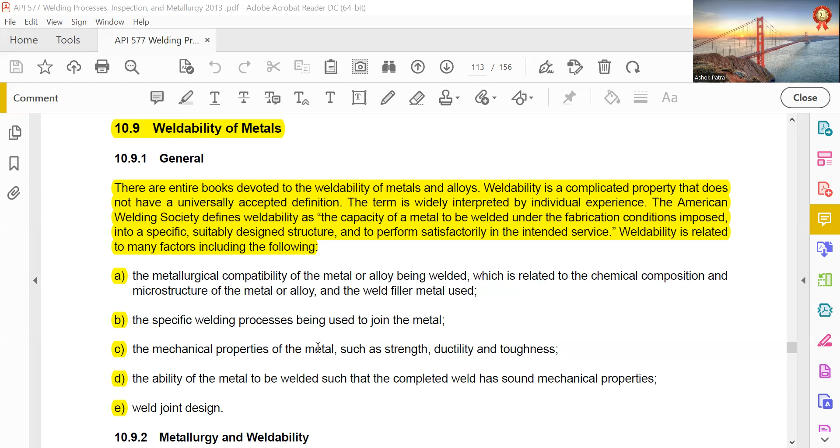Metallurgy and weldability: the primary factor affecting the weldability of metals and alloys is their chemical composition. Chemical composition controls the range of mechanical properties in carbon alloy steels. It has the most influence on the effects of welding on the material. The metal is said to have good weldability if the limits are wide; if not, the metal is considered to have poor weldability.

The heat cycle from welding produces a heat treatment of the metal that can have a substantial effect on mechanical properties depending on the chemical composition of the metal being welded. As noted earlier, each type of metal has welding procedure limits, and within those limits a sound weldment with satisfactory properties can be fabricated. If these limits are wide, then it has good weldability. Let us see what these limits are.

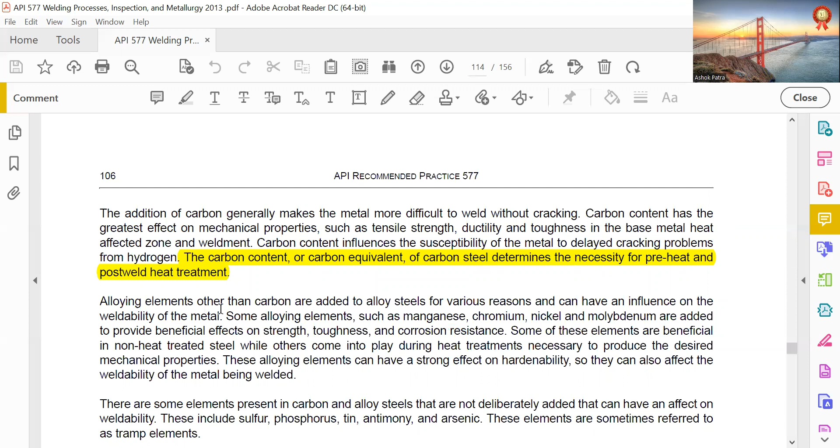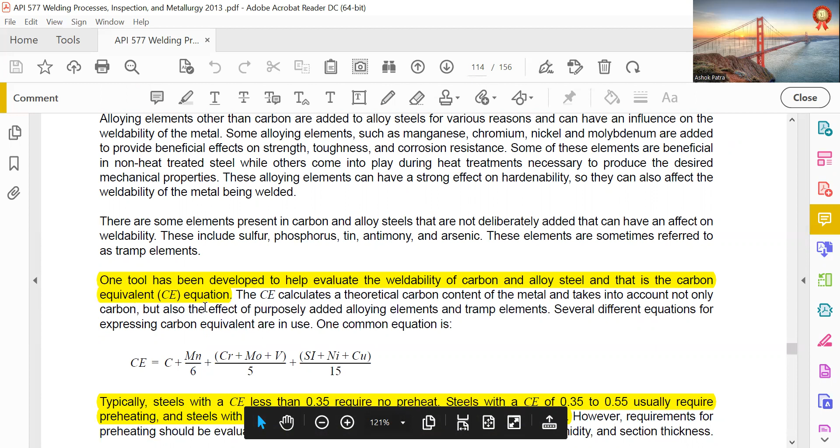The carbon content or carbon equivalent of carbon steel determines the necessity of preheat and post-weld heat treatment. One tool developed to help evaluate the weldability of carbon and alloy steel is the carbon equivalent equation. The CE calculation is: CE (carbon equivalent) = C + Mn/6 + (Chromium + Molybdenum + Vanadium)/5 + (Silicon + Nickel + Copper)/15.

Typically, steels with a CE less than 0.35 require no preheat. Steels with a CE of 0.35 to 0.55 usually require preheating, and steels with a CE greater than 0.55 require both preheating and post-weld heat treatment (PWHT).

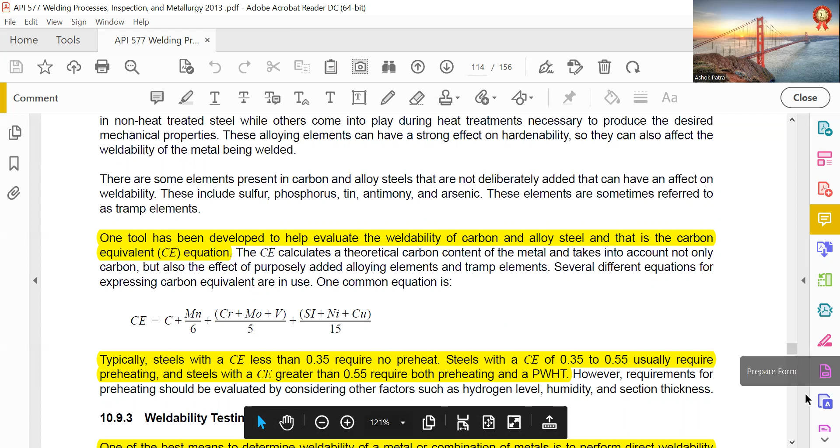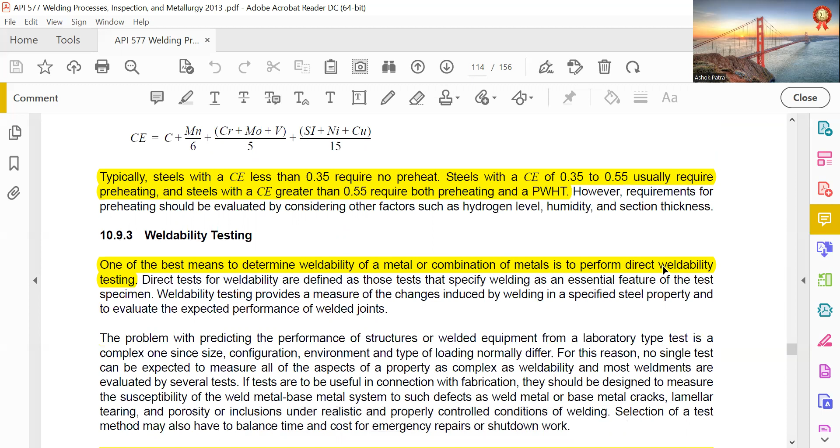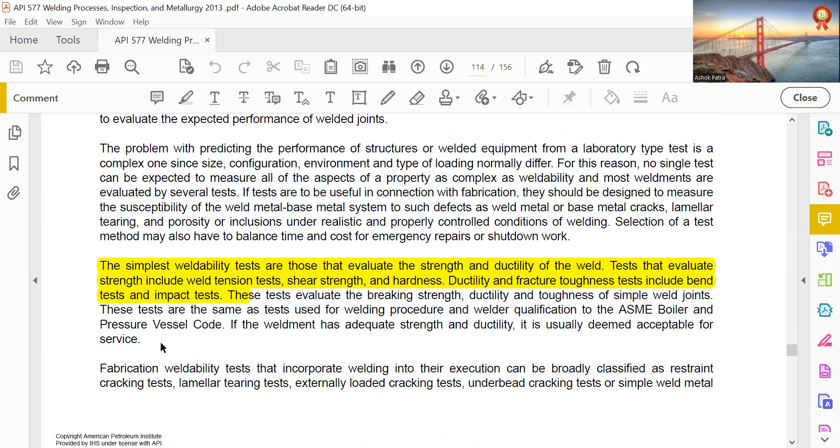Weldability testing: one of the best means to determine the weldability of a metal combination is to perform direct weldability testing. The simplest weldability tests are those that evaluate the strength and ductility of the weld. Tests that evaluate strength include weld tension test, shear strength, and hardness; ductility and fracture toughness tests include bend test and impact test.

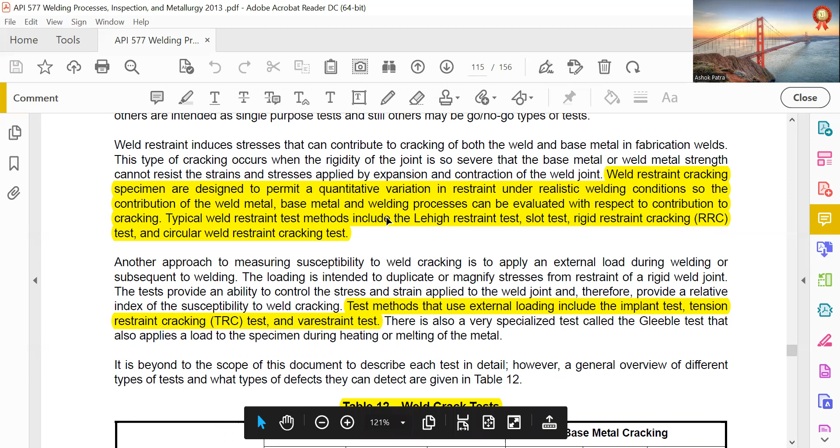Weld restraint cracking specimens are designed to permit a quantitative variation in restraint under realistic welding conditions, so that the contribution of the base metal and welding process to cracking can be evaluated. Typically, weld restraint test methods include the Lehigh restraint test, slot test, rigid restraint cracking (RRC) test, and circular weld restraint cracking test.

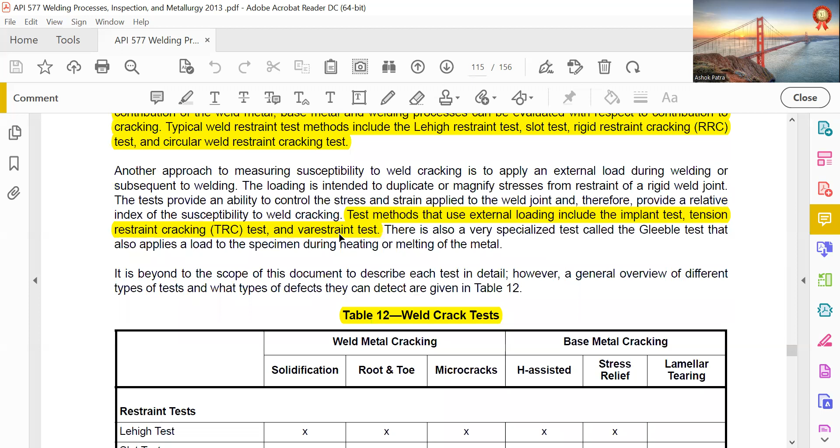Test methods that use external loading include the implant test, tension restraint cracking (TRC) test, and varestraint test.

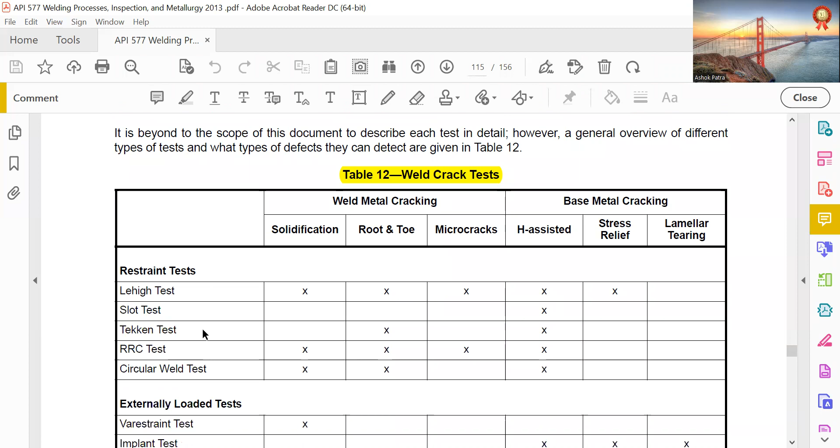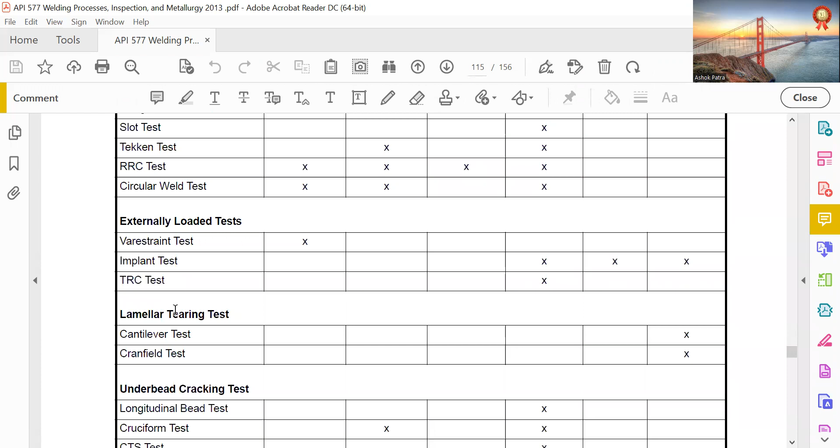So: lehigh test, slot test, tekken test, RRC test, circular weld test - so many names to remember. Externally loaded tests include: the varestraint test, implant test, TRC test, lamellar tearing test, cantilever test, Cranfield test, underbead cracking test, longitudinal bead test, cruciform test, CTS test.

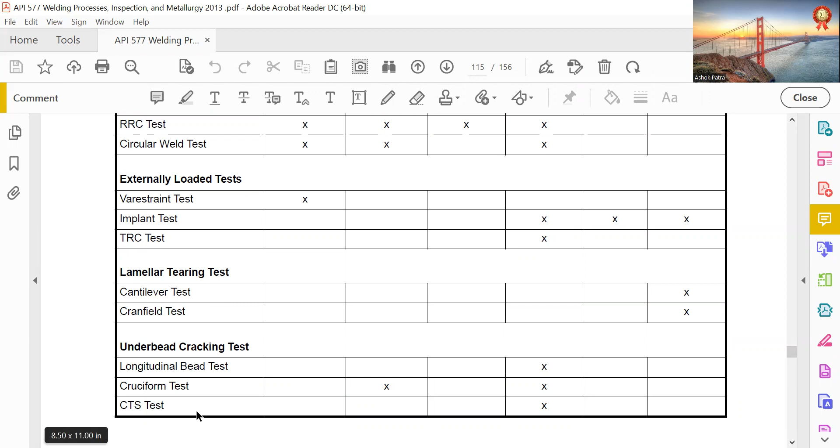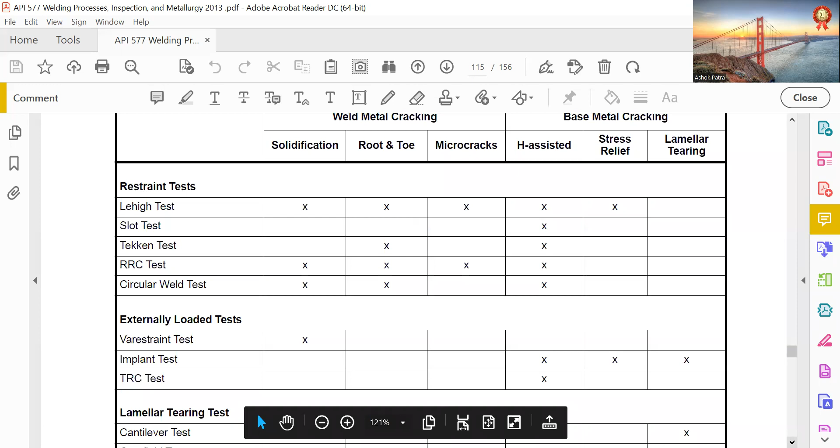So which is for what - just see the summary.

Austenitic stainless steels are iron-based alloys that typically contain low carbon, chromium between 15% to 32%, and nickel between 8% to 37%. They are used for their corrosion resistance and resistance to high temperature degradation. Austenitic stainless steels are considered to have good weldability and can be welded using any common welding process or technique.

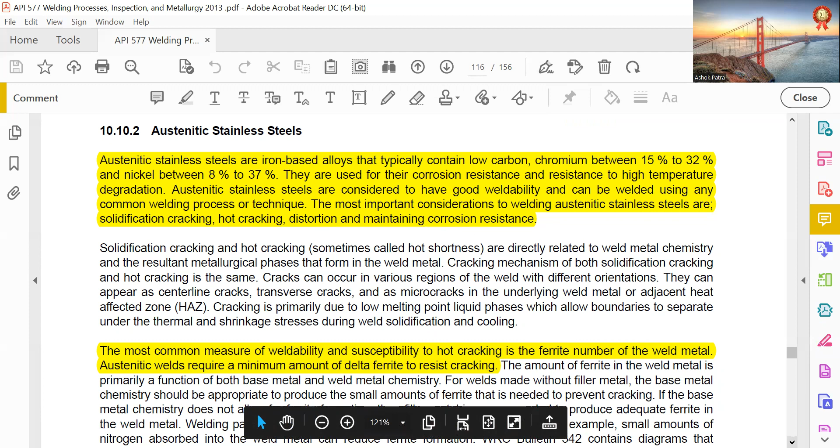The most important considerations when welding austenitic stainless steel are solidification cracking, distortion, and maintaining corrosion resistance. The most common measure of weldability and susceptibility to hot cracking is the ferrite number of the weld metal. Austenitic welds require a minimum amount of delta ferrite to resist cracking. A number of resources recommend a minimum of 5% to 20% ferrite to prevent cracking.

Distortion is more often a problem with welding austenitic stainless steels than with carbon or low alloy steels. Thermal conductivity of stainless steels is about one-third that of carbon steel, and the coefficient of thermal expansion is about 30% greater. This means distortion is greater for austenitic stainless steel than carbon steels. More frequent tack welds may be necessary for stainless steels to limit shrinkage.

Areas exposed to temperatures between 800 degrees Fahrenheit to 1650 degrees Fahrenheit (427 to 900 degrees Centigrade) for a long enough time may precipitate chromium carbide at the grain boundaries. This causes a loss of corrosion resistance due to chromium depletion.

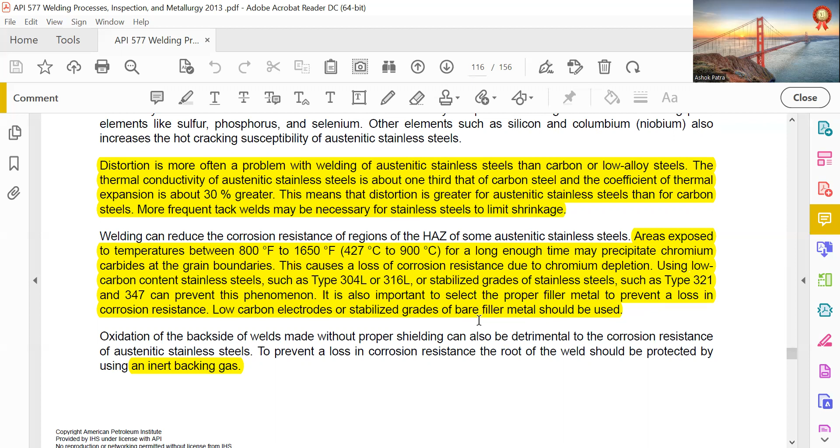Using low carbon content stainless steel such as Type 304L, 316L, or stabilized grade stainless steel such as 321, 347, can prevent this phenomenon. It is also important to select the proper filler metal to prevent a loss in corrosion resistance. Low carbon electrodes or stabilized grades of bare filler metal should be used, and inert backing gas is needed.

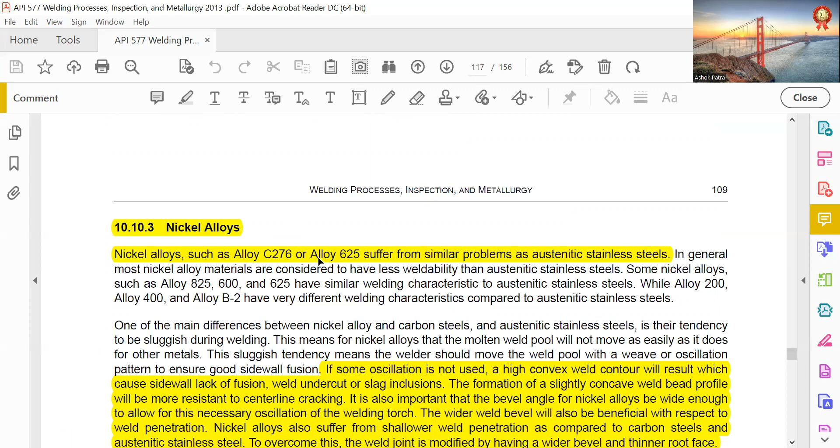Nickel alloys such as alloy C276 and alloy 625 suffer from similar problems as austenitic stainless steels. Most nickel alloy materials are considered to have less weldability than austenitic stainless steels.

If some oscillation is not used, a high convex weld contour will result, which causes sidewall lack of fusion, weld undercut, or slag inclusion. The formation of a slightly concave weld bead profile will have more resistance to centerline cracking. It is also important that the bevel angle of the nickel alloys be wide enough to allow the necessary oscillation of the welding torch.

The wider weld bevel will also be beneficial with respect to weld penetration. Nickel alloys suffer from shallower weld penetration as compared to carbon steel and austenitic stainless steel. To overcome this, the weld joint is modified by having a wider bevel and thinner root face.

For this reason, preheating, which slows down the cooling rate, is actually harmful to the weld, as it permits more opportunity for hot tearing to occur.

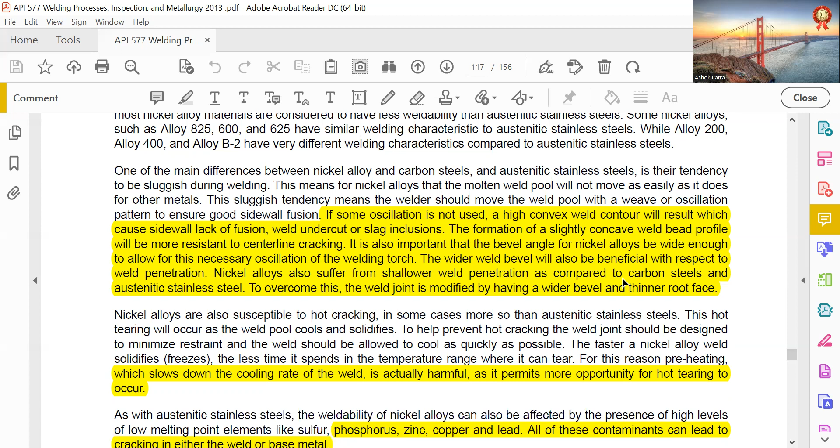As with austenitic stainless steels, the weldability of nickel alloys can also be affected by the presence of high levels of low melting point elements like sulfur, phosphorus, zinc, copper, and lead. These contaminants can lead to cracking in either the weld or base metal.

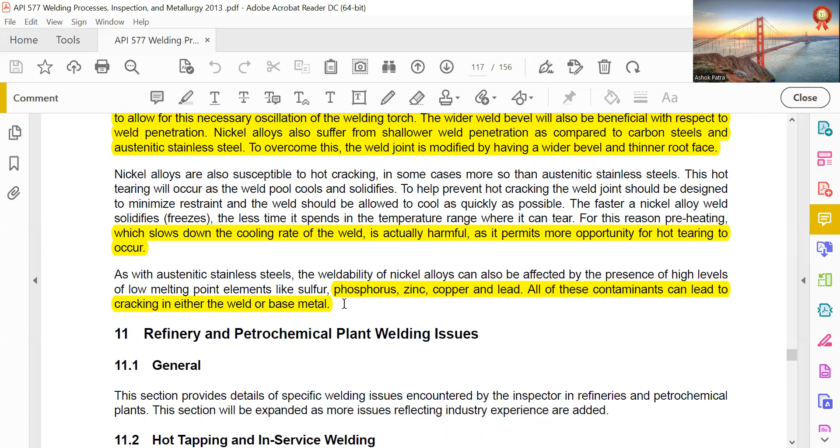Hot tapping and in-service welding.

API 2201 provides an in-depth review of the various aspects to consider when hot tapping or welding on an in-service piping or equipment. Prior to performing that work, a detailed written plan should be developed and reviewed. The following is a brief summary of the welding related issues.

Two primary concerns when welding on in-service piping and equipment are burn through and cracking. Burn through will occur if the unmelted area beneath the weld pool can no longer contain the pressure within the pipe or equipment. Weld cracking results when fast weld cooling rates produce a hard, crack-susceptible weld microstructure.

Fast cooling rates can be caused by flowing contents inside the piping and equipment, which remove heat quickly.

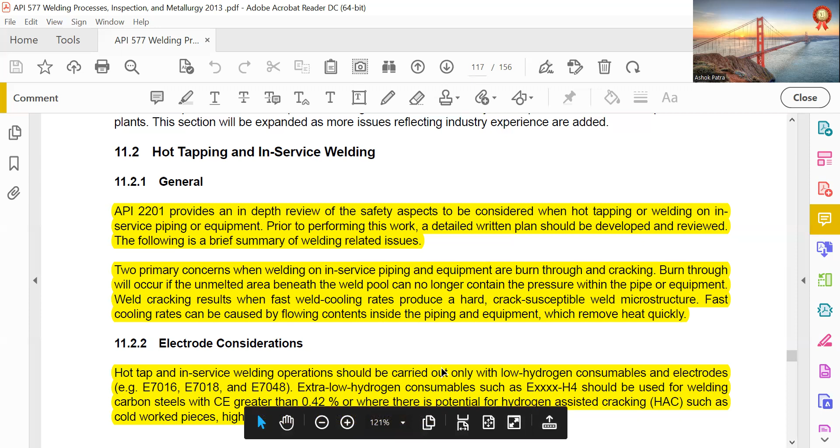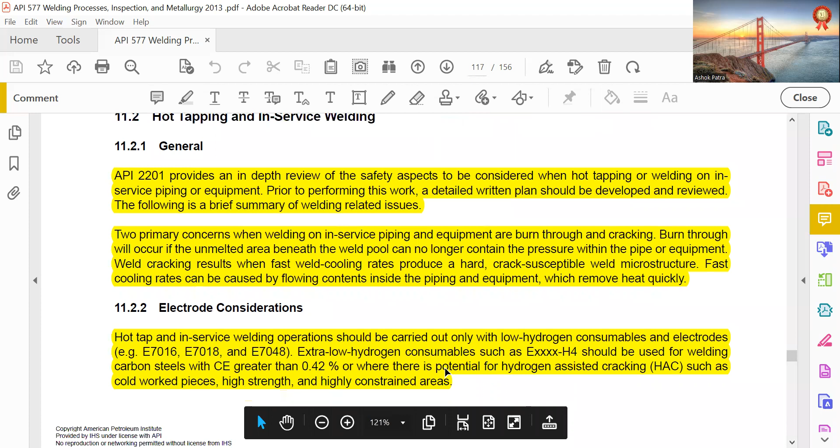Hot tap and in-service welding operations should be carried out only with low hydrogen consumables and electrodes. Extra low hydrogen consumables such as EXXXXH4 should be used for welding carbon steels with carbon equivalent greater than

0.42%, or where there is potential for hydrogen assisted cracking (HAC), such as cold work pieces, high strength, and highly constrained areas.

Cellulosic type electrodes E6010, E6011, E7010 may be used for root and hot pass. However, the manipulation of the low hydrogen electrode for root pass is not as easy, but it can be done by training and practice. It should be noted that cellulosic electrodes have the following adverse effects on the integrity of the weldment: deep penetration, therefore higher risk of burn through than low hydrogen electrodes.

And high diffusible hydrogen, therefore higher risk of hydrogen assisted cracking.

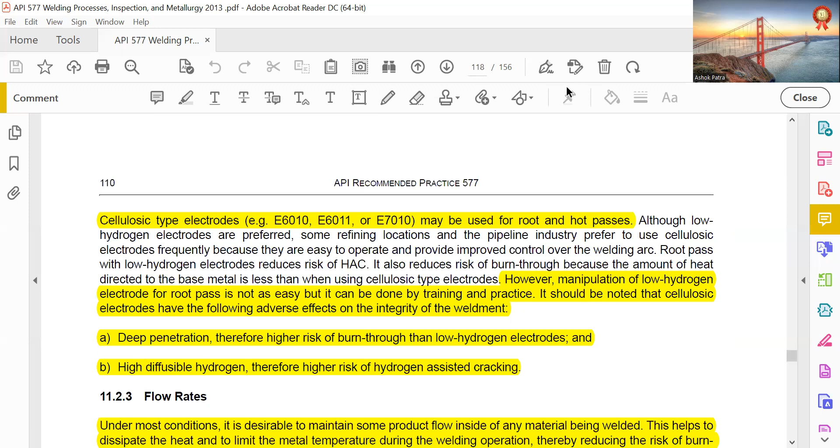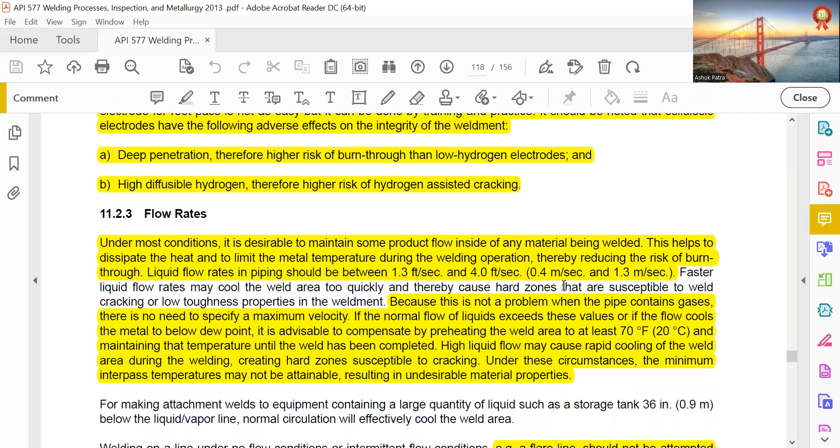Flow rates. Under most conditions, it is desirable to maintain some product flow inside any material being welded. This helps to dissipate the heat and to limit the metal temperature during the welding operation, thereby reducing the risk of burn through. Liquid flow rates in piping should be between 1.3 feet per second and 4 feet per second,

or 0.4 meter per second and 1.3 meter per second. Faster liquid flow rates may cool the weld area too quickly and thereby cause hard zones that are susceptible to weld cracking, or low toughness properties in the weldment.

Because this is not a problem when the pipe contains gases. There is no need to specify the maximum velocity. If the normal flow of liquids exceeds these values or if the flow cools the metal below dew point, it is advisable to compensate,

by preheating the weld area to at least 70 degrees Fahrenheit and maintaining the temperature until the weld has been completed.

High liquid flow may cause rapid cooling of the weld area during welding, creating hard zones susceptible to cracking. Under these circumstances, the minimum interpass temperature may not be attainable, resulting in undesirable material properties.

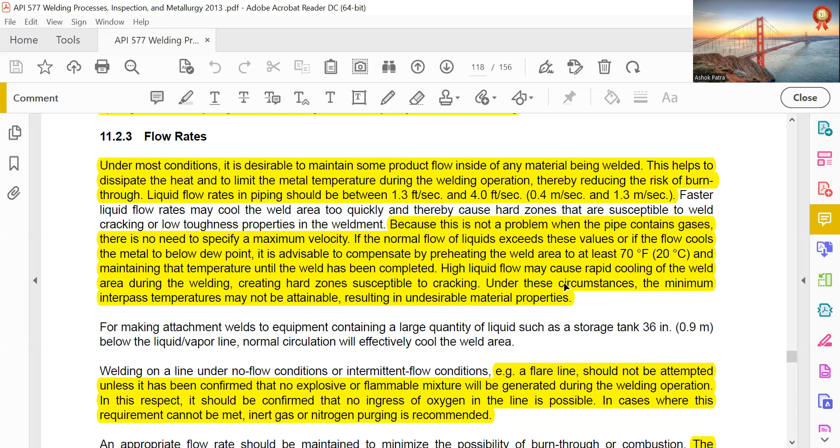A flare line should not be attempted unless it has been confirmed that no explosive or flammable mixture will be generated during the welding operation. In this respect, it should be confirmed that no ingress of oxygen into the line is possible. In cases where this requirement cannot be met, inert gas or nitrogen purging is recommended.

The minimum flow rate is 1.3 feet per second, or 0.4 meter per second, of liquid and gas for liquids, and a maximum flow rate is usually required. In general, 4.0 feet per second, or 1.2 meter per second, is the upper limit. There is no restriction on maximum velocity of gas lines, subject to maintaining preheat temperature.

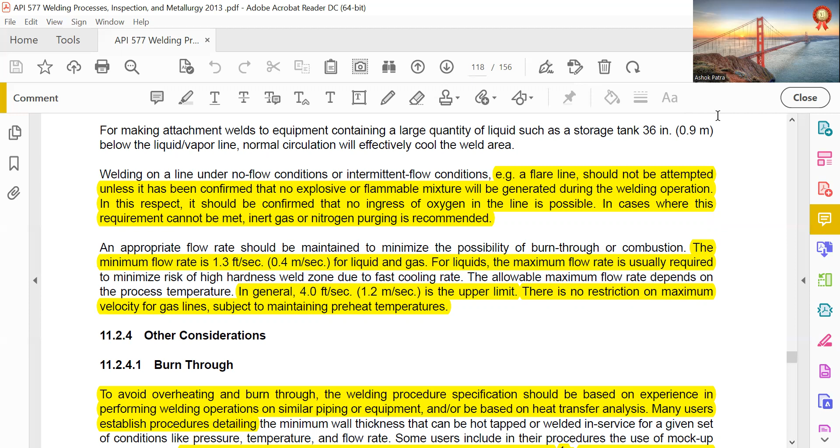Burn through. To avoid overheating and burn through, the welding procedure specifications should be based on experience of performing welding operations on similar piping or equipment, or based on heat transfer analysis. Many users establish procedures detailing

when the actual thickness of the material to be welded is less than 1/4 inch, a mock-up coupon representing the actual material thickness should be used. The welding parameters are recorded and the weld penetration is verified by etching. This information becomes supplemental to the repair package.

To minimize burn through, the first weld pass to equipment or piping less than 1/4 inch, 6.35 millimeters thick, should be made with 3/32 inch, 4.76 mm, or smaller diameter welding electrodes to limit heat input.

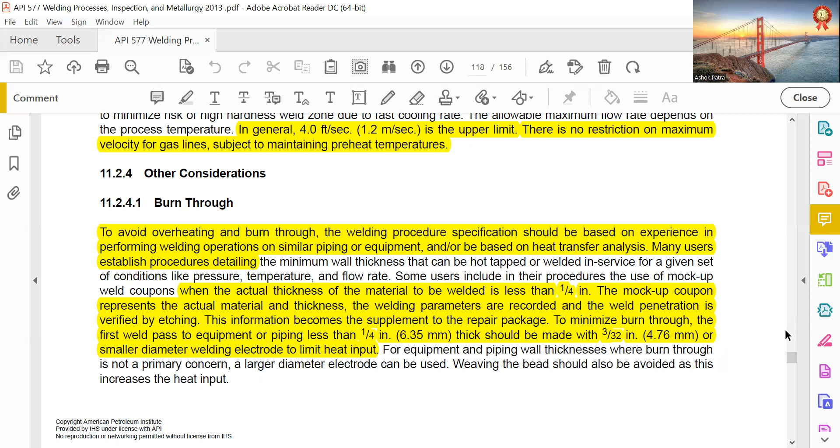Hot taps are recommended when attaching a nozzle to pipe fabricated from plate material, to prevent lamellar tearing of the pipe.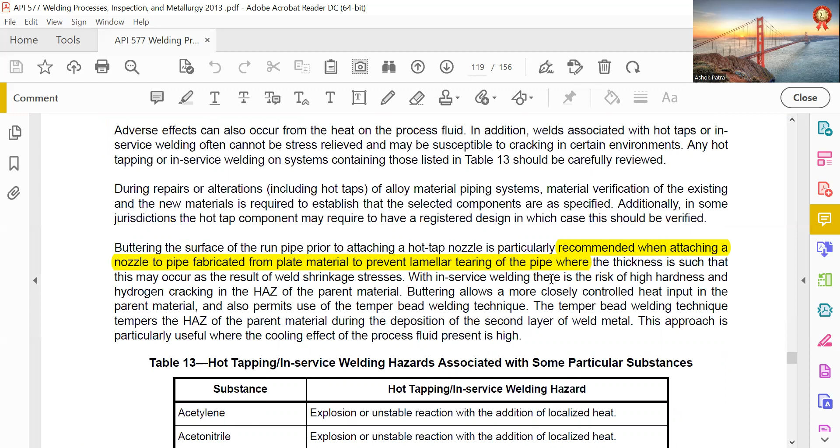Lack of fusion with GMAWS welding short circuit. Due to this inherent nature of the welding process, the BPV Code Section 9 restricts this process by requiring welders to qualify with mechanical testing rather than by radiographic examination.

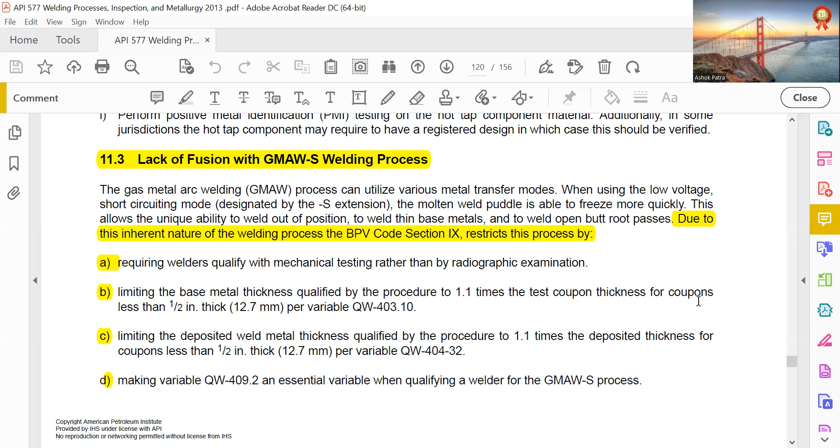Limiting the base metal thickness qualified by procedure is 1.1 times the test coupon thickness for coupons less than half inch thick, 12.7 mm, per variable QW403-10. Limiting the deposited weld metal thickness qualified by the procedure is 1.1 times the deposited thickness for coupons less than 12.7 mm or half inch thick, variable QW404-32, making variables QW409.2 an essential variable when qualifying a welder for the GMAWS process.

The quick freeze characteristic which can result in lack of fusion is the reason this process is frequently written out of purchase requisitions, and NDE inspection is required in pipeline welding. Automated ultrasonic testing has been adopted to overcome this problem. The risk of LOF associated with GMAWS means restrictions on qualification of welders using radiography only. The inspector should note this potential problem.

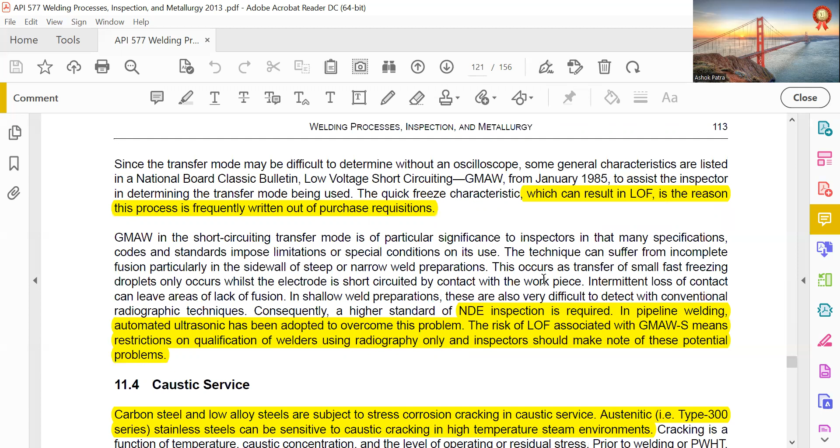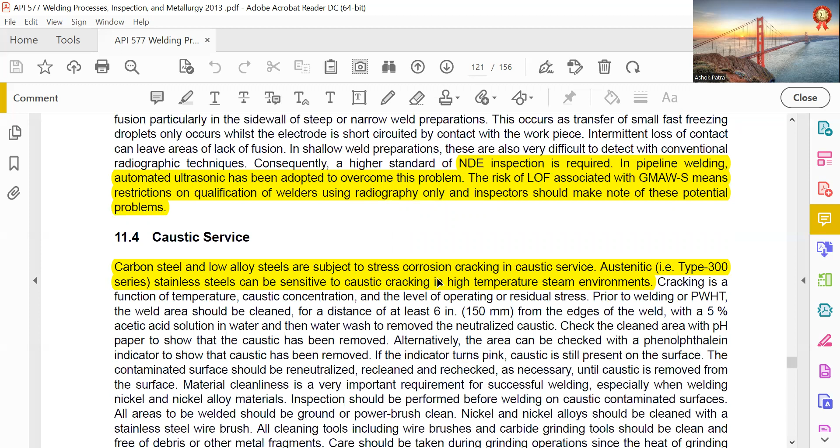Caustic service. Carbon steel and low alloy steels are subject to stress corrosion cracking in caustic service. Austenitic type 300 series stainless steels can be sensitive to caustic cracking in high temperature steam environments.

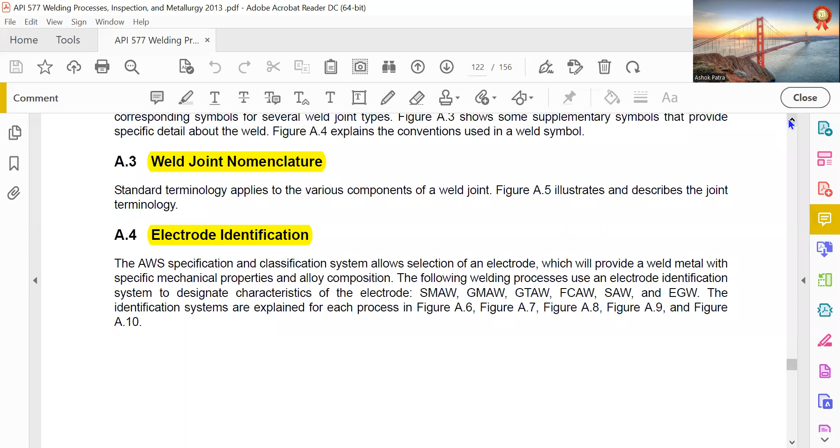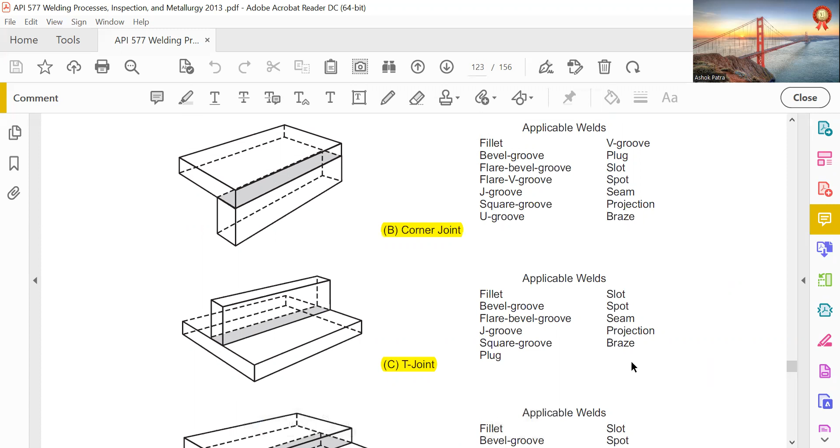Weld joint nomenclature, electrode identification. There are 5 types of joints: butt joint, corner joint, T-joint, lap joint, and edge joint. A total of 5 types.

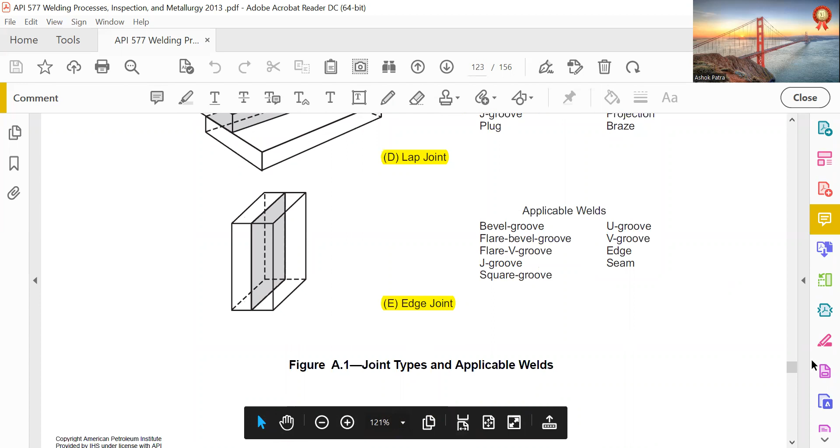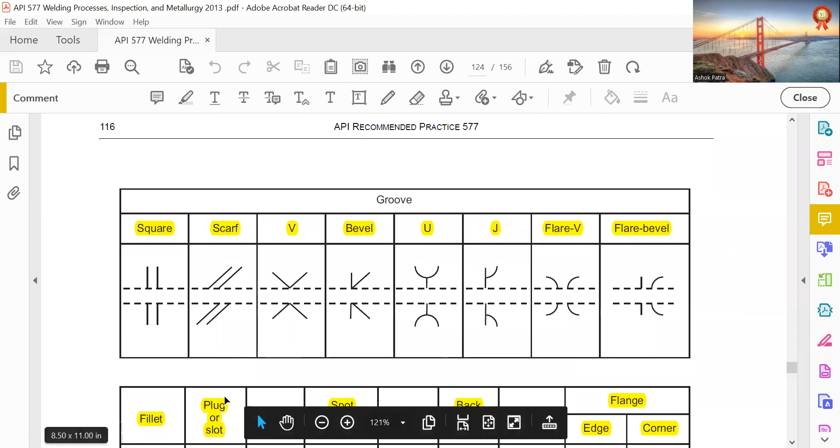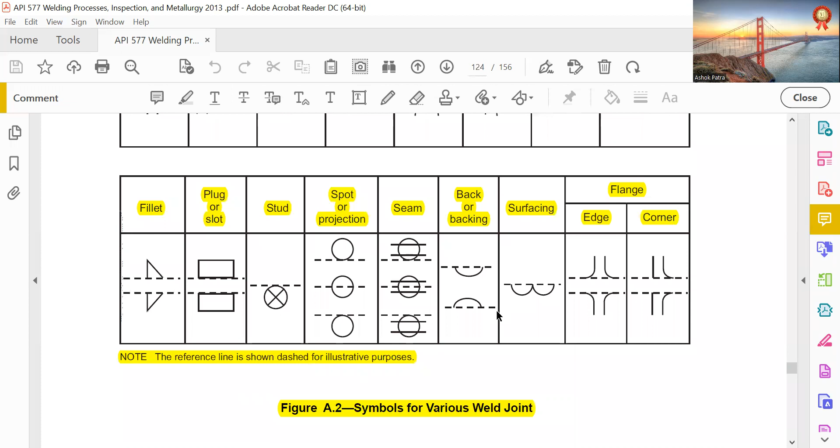Joint type and applicable welds. This is the nomenclature for welding: square butt, scarf butt, V butt, bevel butt, U groove, J groove, flare bevel. Also fillet, plug, stud, spot, seam, back or backing, surfacing, flange, edge, and corner.

The reference line is shown dashed for illustrative purposes. Symbols for various weld joints.

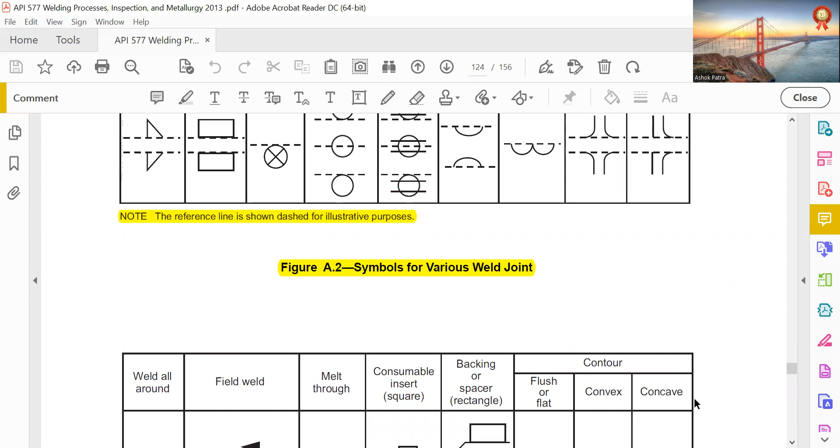Weld all around, field weld. There is a flag. All around is a circle. This circle, melt through, is something like this. Consumable insert is a square. Backing or spacer is a rectangle. Flush or flat. Convex or concave.

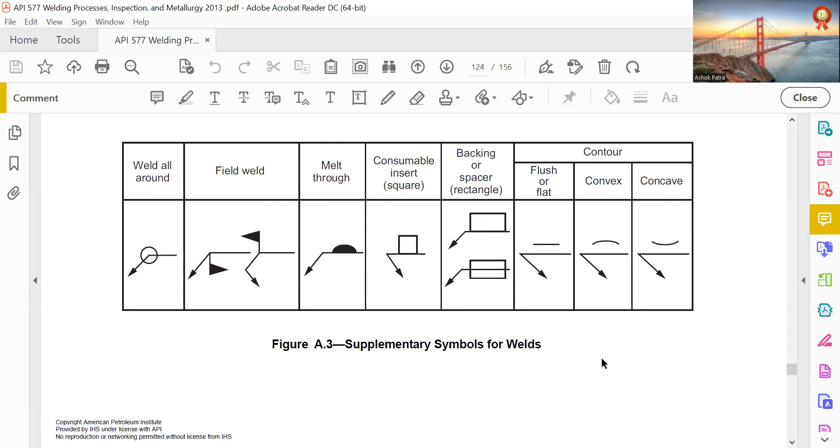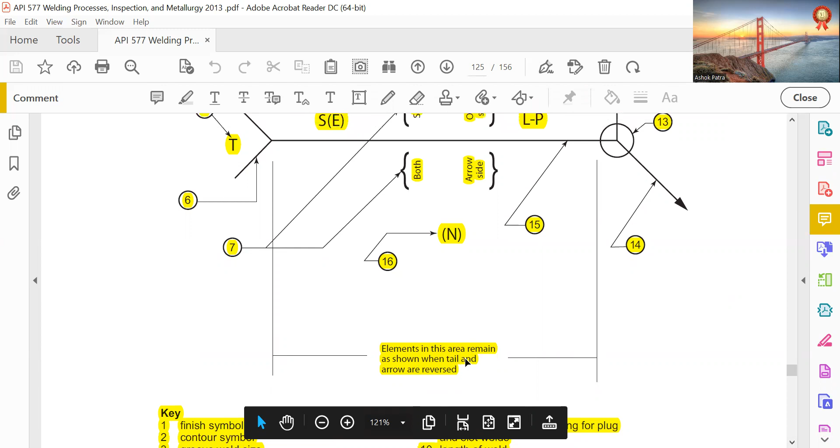Supplementary symbols for welds. So this is the weld symbol. The elements in the area remain as shown when the tail and arrow are reversed. So anything reversed, no problem for AWS.

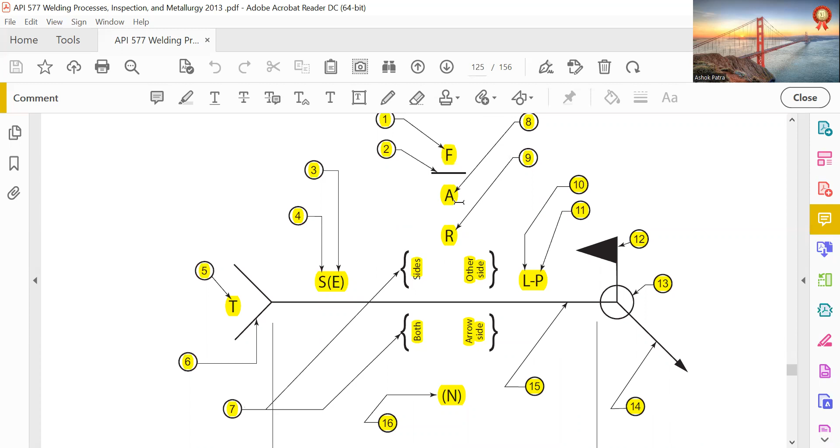So this is the arrow side, and this is the other side. If anything is above, it's the other side; arrow side should be at the bottom. The arrow is pointing to that side, written on the bottom. The far side or other side is written on the top. One needs to see what is there.

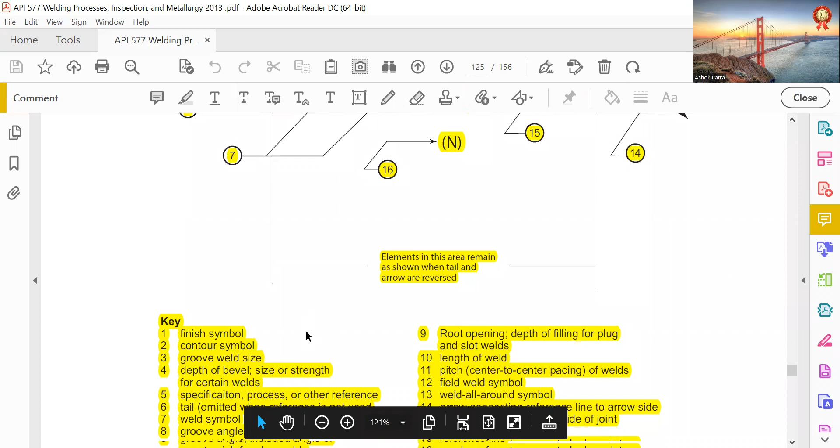Finish symbol, contour symbol, groove weld size, depth of bevel, size or strength for certain welds. So this is 3, 4. 3 is bracketed and 4 is outside. So groove weld size and depth of bevel, size or strength of the certain weld.

Certain weld: 5 is specification, process, other references. Everything should be in the tail, omitted when reference is not used. So 6, 7 in the tail. 7 can be upside or downside, no problem.

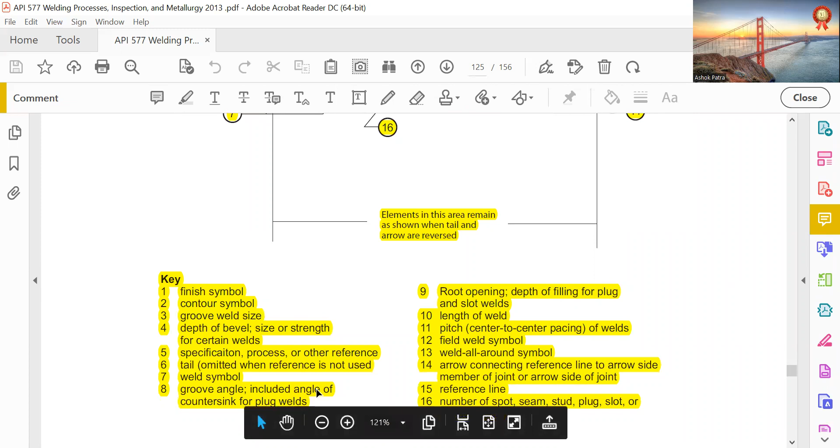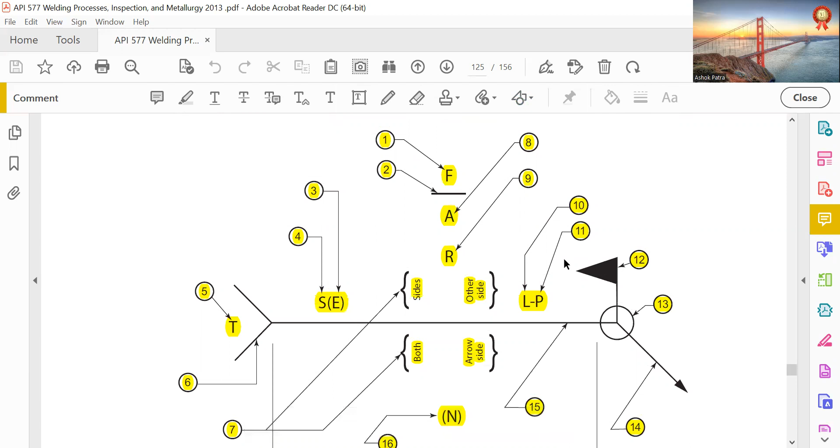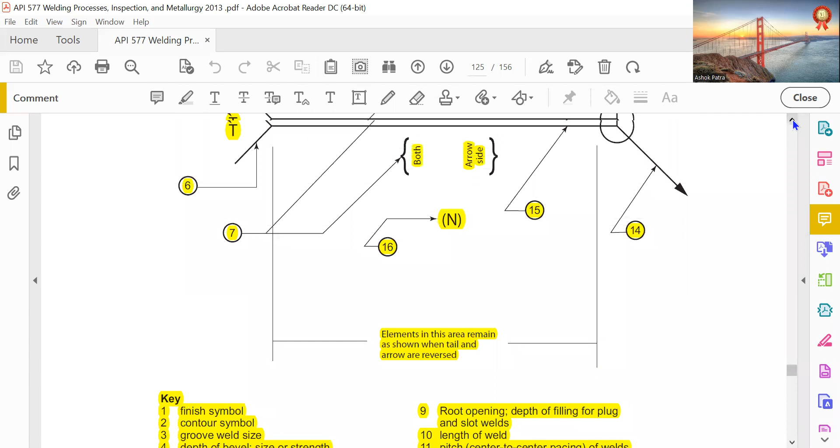8 is the groove angle, included angle or countersink angle of plug welds. So this is 8, then 9, 10, 11. 8 is the groove angle, included angle of the countersink for plug welds, root opening depth, filling for plug and slot welds, length of the weld, pitch. Pitch is on the outside; length is LP.

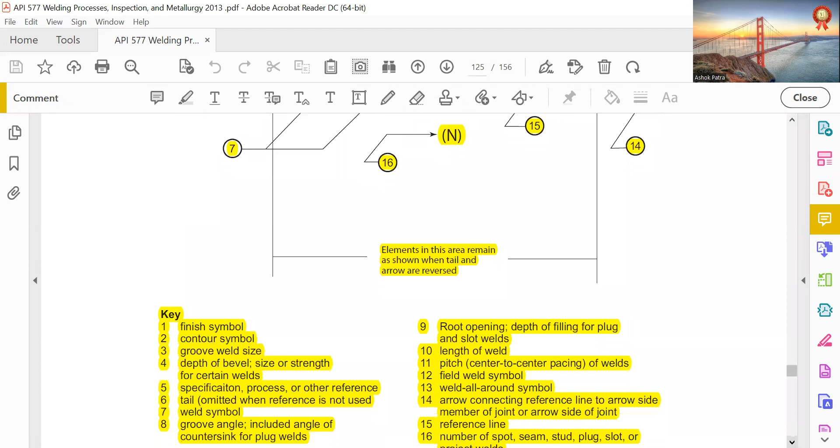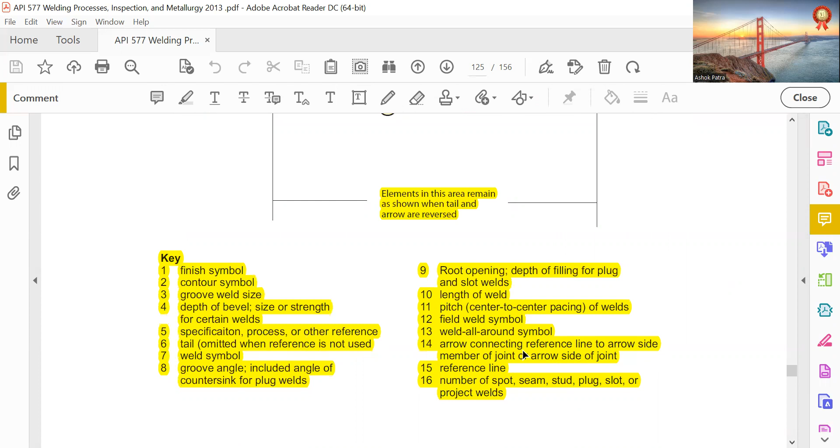Field weld symbol already shown, weld all around symbol. Arrow connecting reference line, arrow side member of the joint, arrow side joint. Reference line, number of spot, seam, stud, plug, slot or projected welds. Reference line, the center line. So this one is the reference line.

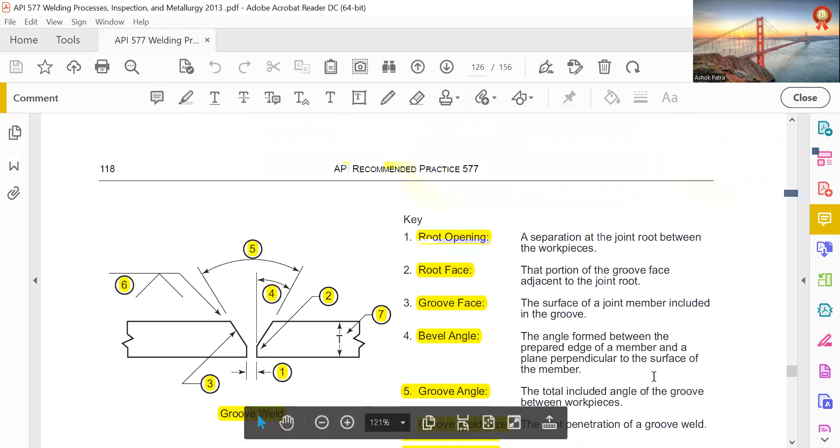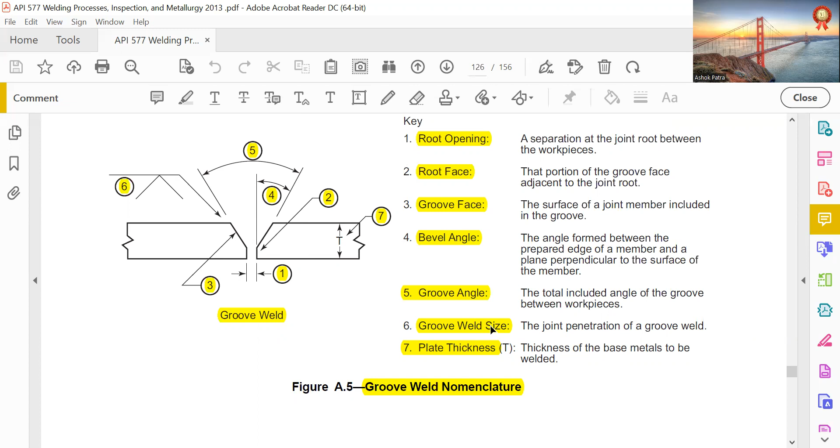So this is how marking of root opening and root face is done. This is the root opening, this is the root face (2), and 3 is the groove face. Then 4 is the bevel angle total, and the half bevel angle, included angle or groove angle is 5. 6 is the groove weld size. Plate thickness is T.

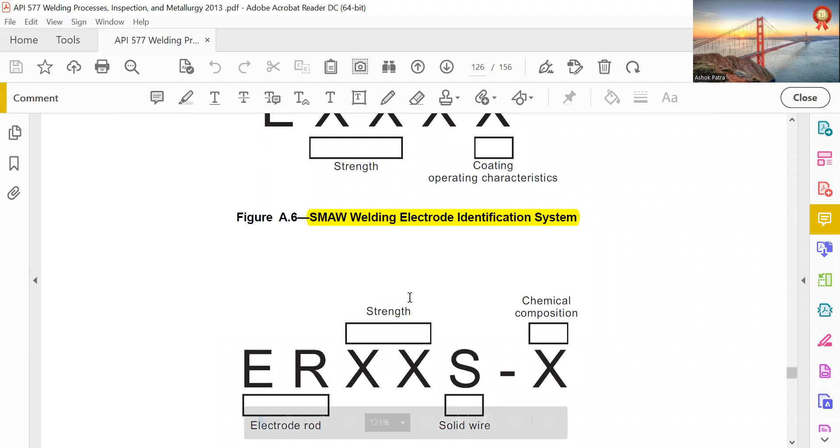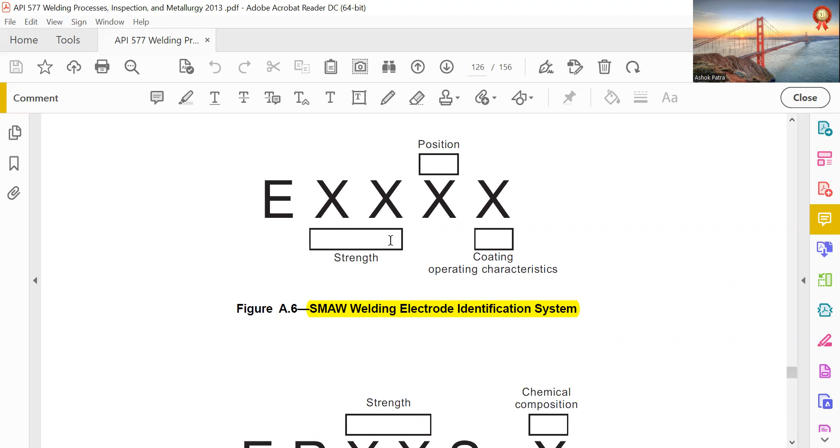Groove weld nomenclature. This is the SMAW welding electrode identification system, E. 60 is strength, 70 is strength, 70,000 or 60,000, position, and coating operating characteristics. ER is for electrode rod. Here is the strength 70, 60, S for solid wire, and then chemical composition 2, 2, 3, 4, 9, something like that.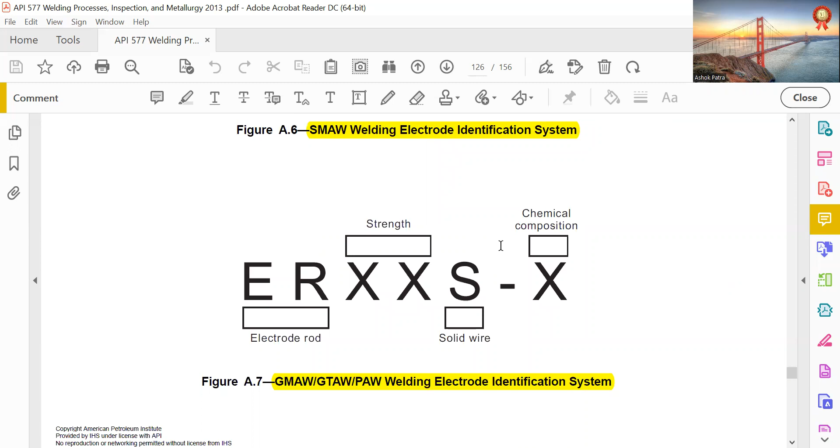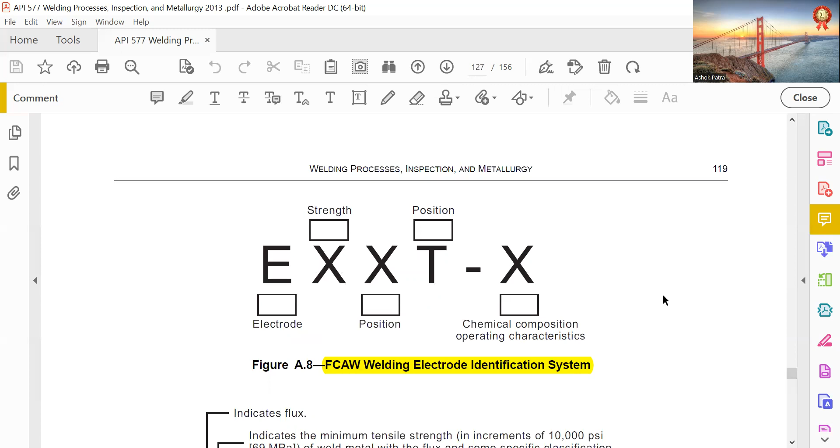FCAW welding electrode identification system. Electrode, this is the strength, position, chemical composition, operating characteristics. GTAW welding electrode identification system. EGW welding electrode identification is not required.

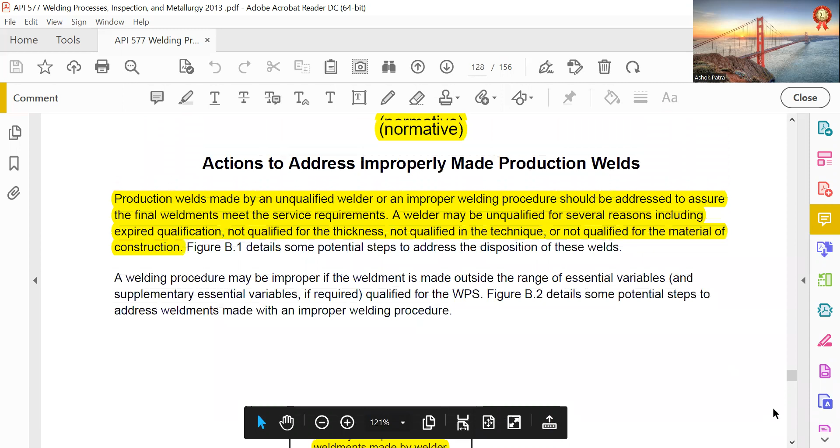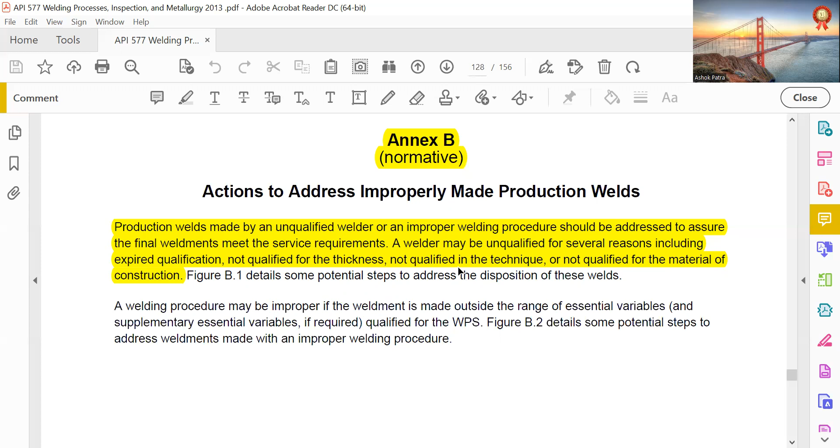Actions addressing improperly made production welds made by an unqualified welder or improper welding procedure should be taken to assure the final weldment meets service requirements. A welder may be unqualified for several reasons, including expired qualification, not qualified for the thickness, not qualified for the technique, or not qualified for the material of construction.

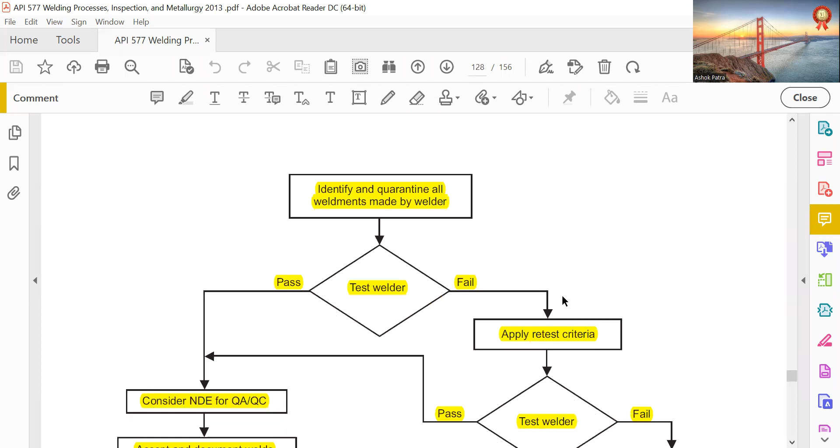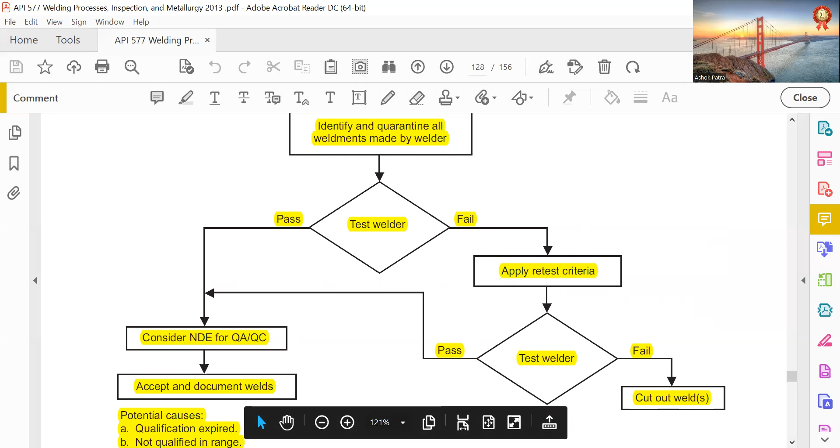Identify and quarantine all weldments made by the welder. Test the welder: pass or fail. If fail, apply retest criteria. Test welder again; if fail, cut out the welds, all joints cut out. Then if pass, consider NDE for QA/QC, accept and document welds.

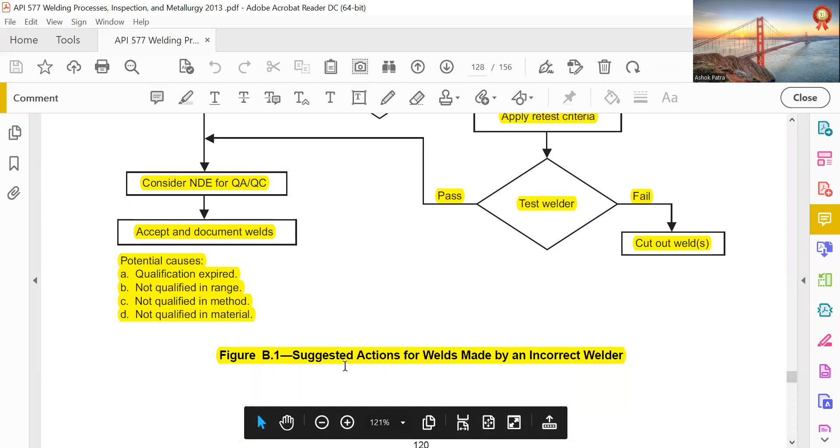Potential causes: qualification expired, not qualified in range, not qualified in method, not qualified in material. Suggested action for welds made by an incorrect welder.

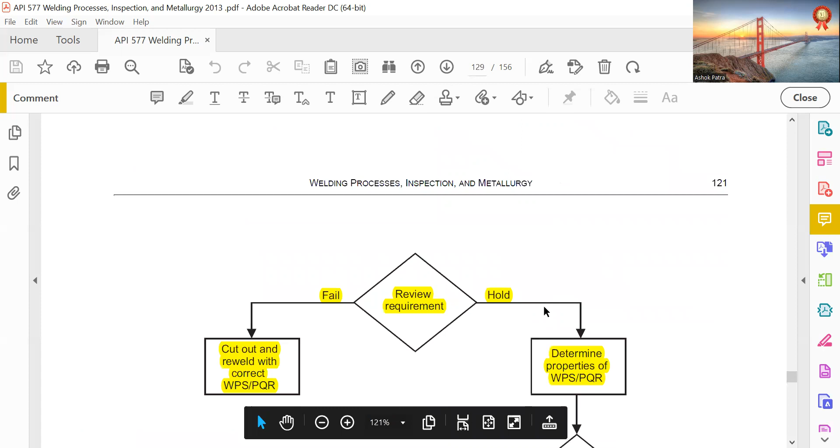Review requirement: if fail, cut out and reweld with correct WPS. Hold, determine properties of the WPS. Review or rerun the PQR if unsuitable for the application. Cut out and reweld with the correct WPS suitable for the application.

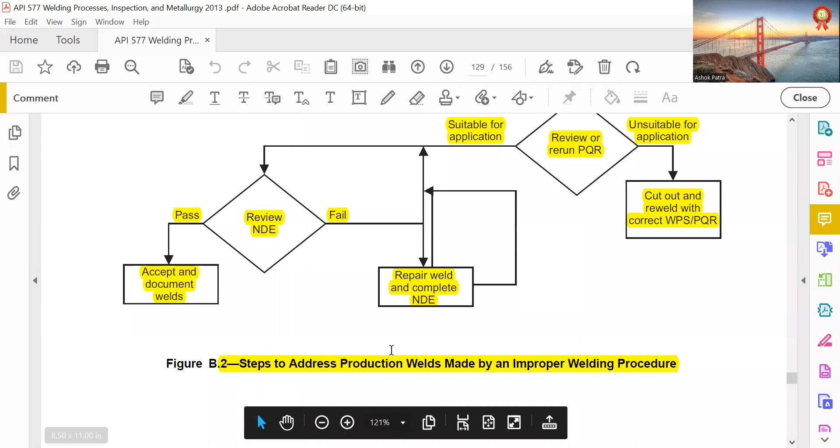Repair weld and complete NDE. If fail, repair weld and complete NDE; if pass, review and accept and document the welds. Steps to address production welds made using an improper welding procedure.

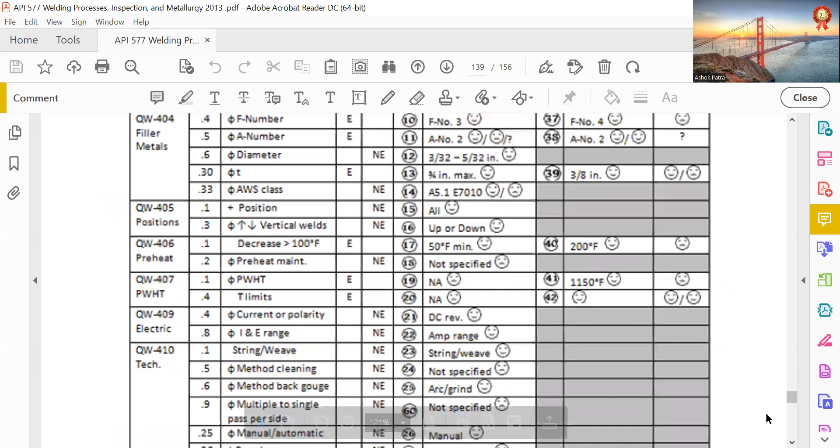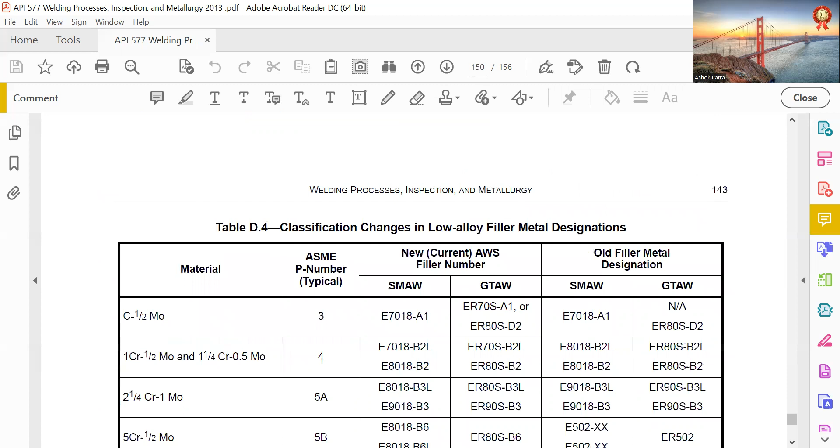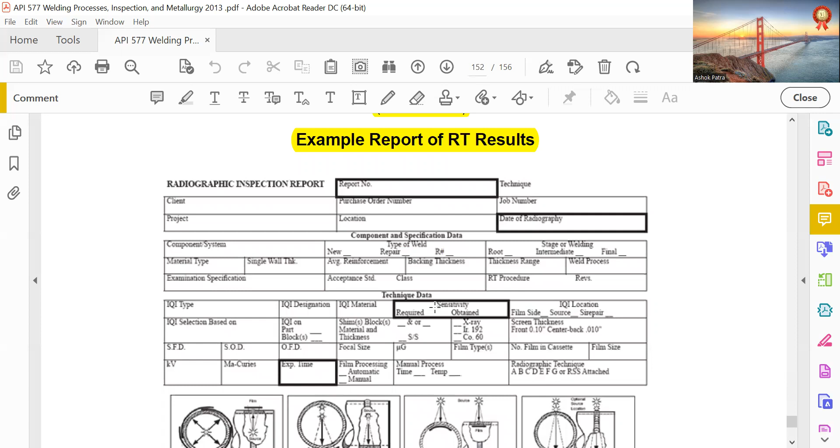Here there is a radiography report, Annex C, example report of RT results, which you can follow. That's all, 577 finished. We'll stop here.